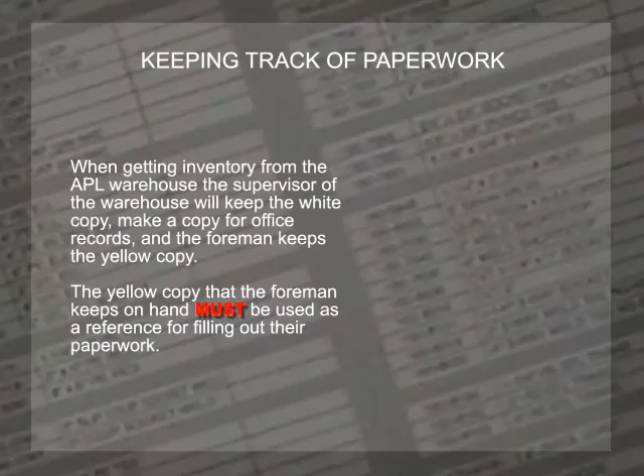When getting inventory from the APL warehouse, the supervisor of the warehouse will keep the white copy, make a copy for office records, and the foreman keeps the yellow copy. The yellow copy that the foreman keeps must be used as a reference for filling out their own paperwork. Your yellow copy must be kept on hand to account for all your inventory when filling out weekly partial reports and completes. This will save time and help you recall all the inventory you got from the warehouse.

Remember, all your paperwork for that job should be accounted for in your complete packet. This means all inventory used, returned, or scraps thrown away should be documented.

Inventory is assigned to APL from Southwest Gas. It is then on the APL books until it is accounted for. APL is responsible to pay for lost and undocumented inventory.

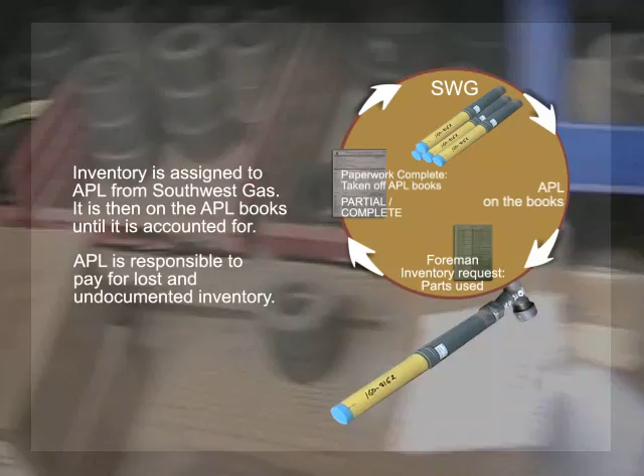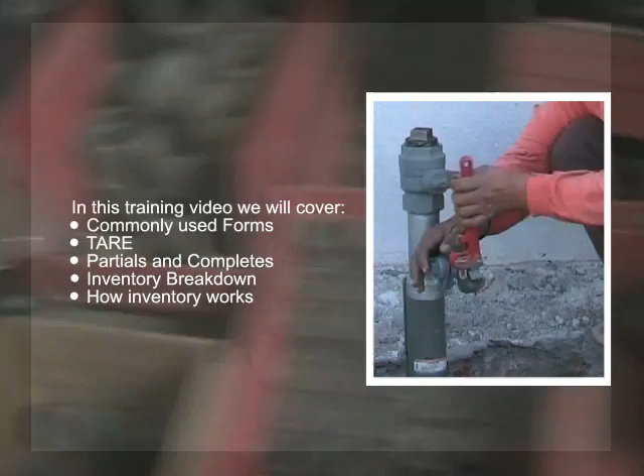In this training video, we will cover commonly used forms, TARE, partials and completes, inventory breakdown, and how inventory works.

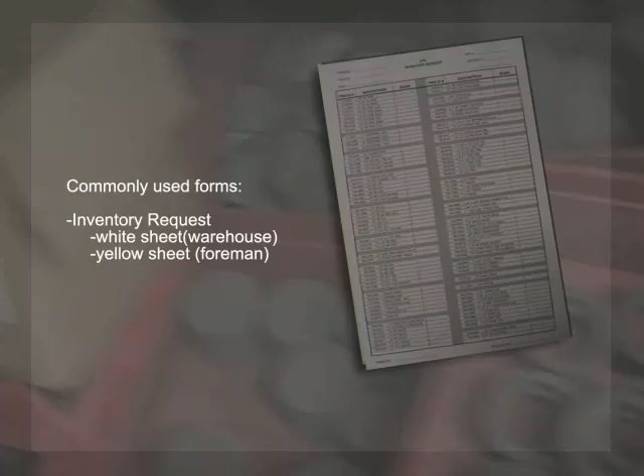These are some of Arizona Pipeline's commonly used forms. Inventory request sheet, white sheet for the warehouse and yellow sheet for the foreman. Mains, construction order, CO and SLST. Services, accelerated construction, AC and SX.

If the job takes longer than 1 week, you must turn in a partial weekly. There you document the inventory that you have used up to that point. Check with your superintendent on what day you turn in your partial.

When the job is finished, then the complete job packet is turned in, including all the weekly partials. All inventory checked out must be accounted for on these forms.

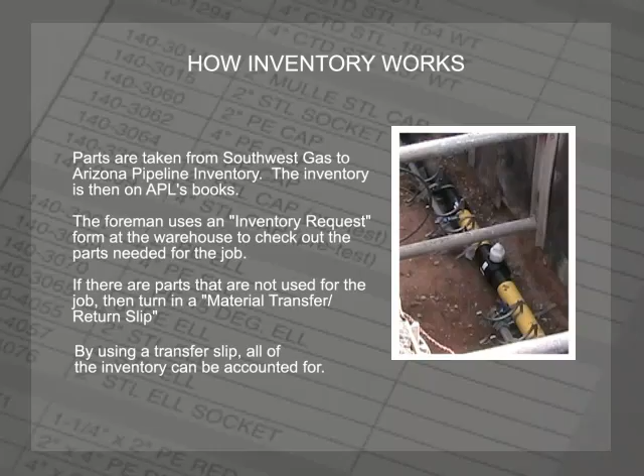Parts are taken from Southwest Gas to Arizona Pipeline inventory. The inventory is then on APL's books. Foreman uses an inventory request form at the warehouse to check out the parts needed for the job.

If there are parts that are not used for the job, then turn in a material transfer return slip. By using a transfer slip, all the inventory can be accounted for.

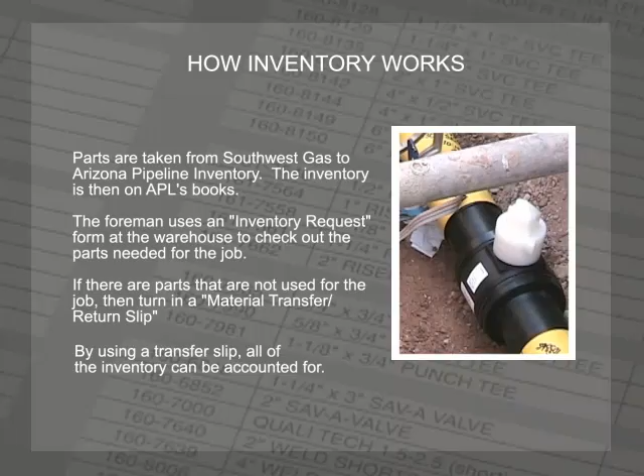If there are extra parts that are damaged or parts that can't be used, they should be charged off as TARE. The 6-inch PVC sleeving TARE would be shown on your paperwork as G TARE 100-9000 or S TARE 100-9000.

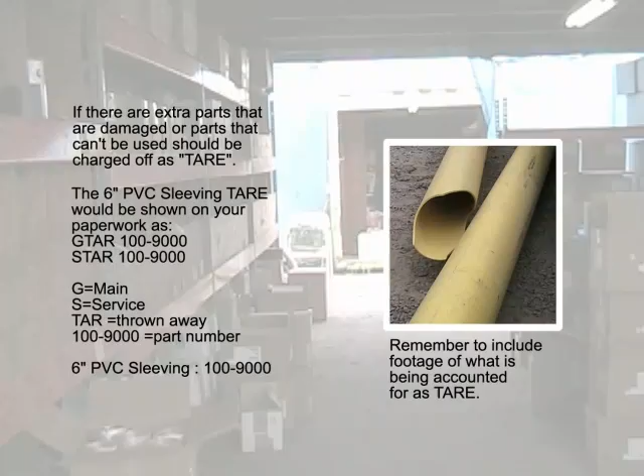Remember to include footage of what is accounted for as TARE. All materials, either installed or TARE, need to be accounted for on your paperwork for both partials and completes.

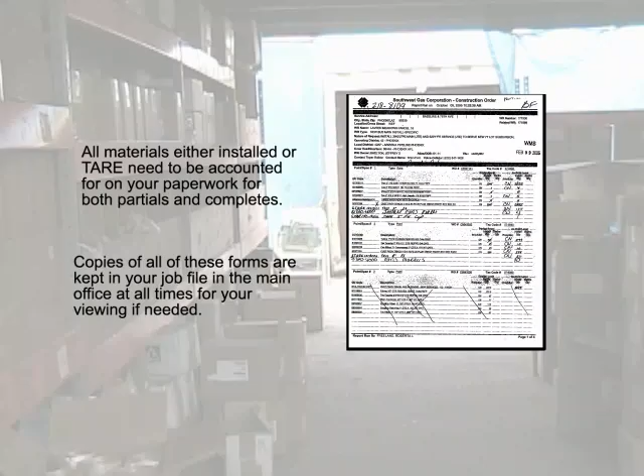Copies of all these forms are kept in your job file in the main office at all times for your viewing if needed. All inventory needs to be tracked to the WR number assigned to the job.

If inventory checked out is used for a different WR, then you are required to fill out a transfer slip and notify the warehouse so they can assign the inventory to the new WR.

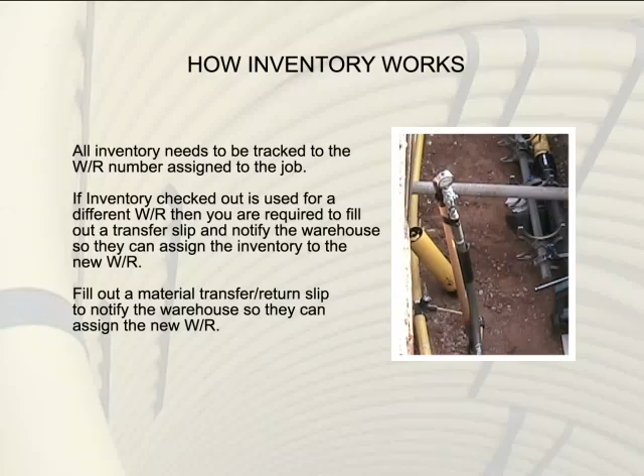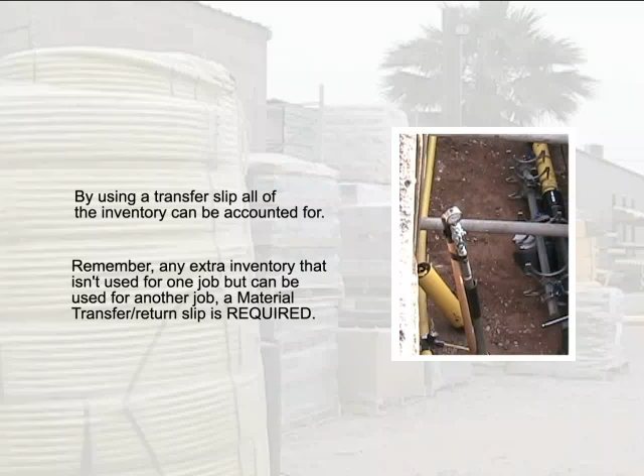Fill out a material transfer return slip to notify the warehouse so they can assign the new WR. By using a transfer slip, all of the inventory can be accounted for. Remember, any extra inventory that isn't used for one job, but can be used for another job, requires a material transfer return slip. Some common jobs have separate part numbers and each one needs to be tracked individually.

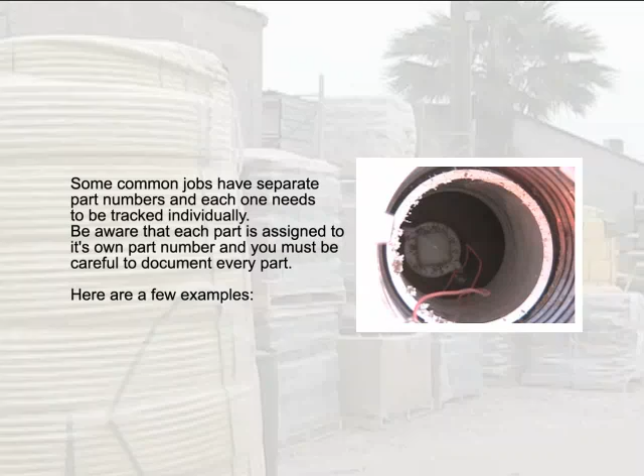Be aware that each part is assigned to its own part number and you must be careful to document every part. Here are a few examples.

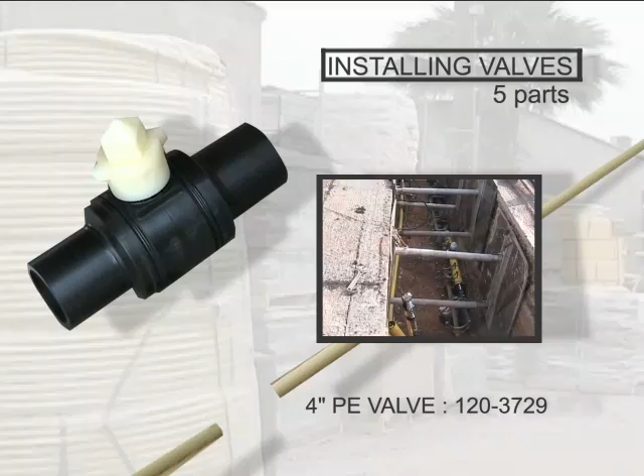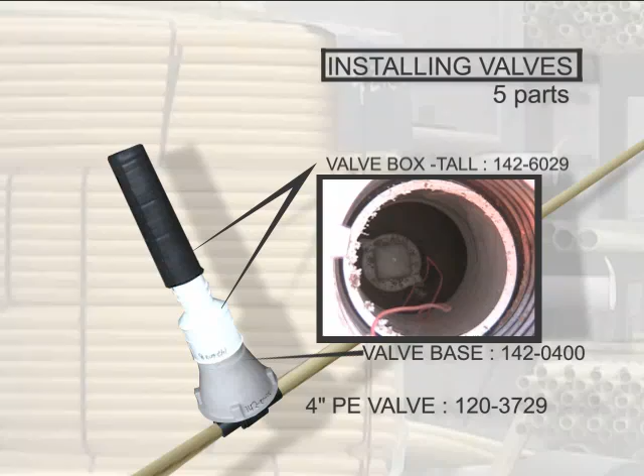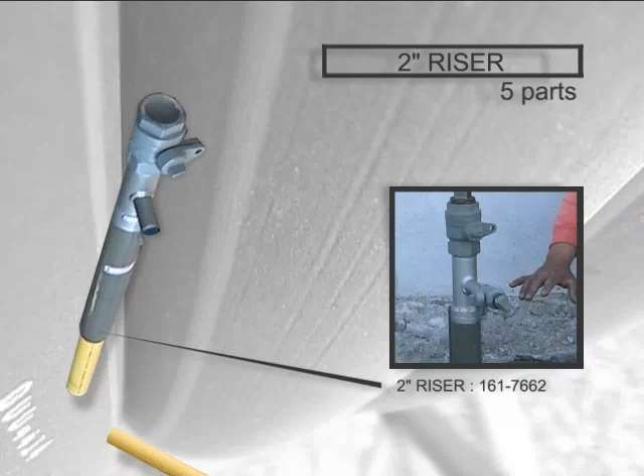When installing valves, 5 parts are required: the valve itself, the valve base, the valve box, a debris cap, and a gas lid. There are also 5 parts for the 2-inch riser: the riser, a 2-inch 90-degree elbow,

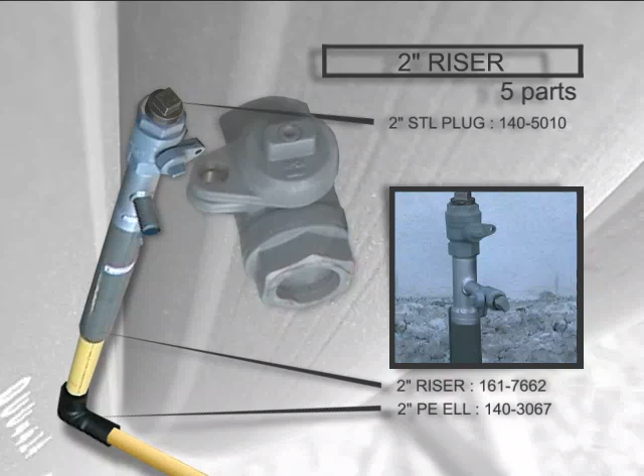a 2-inch steel plug, a 1-inch stopcock, and a 1-inch steel plug.

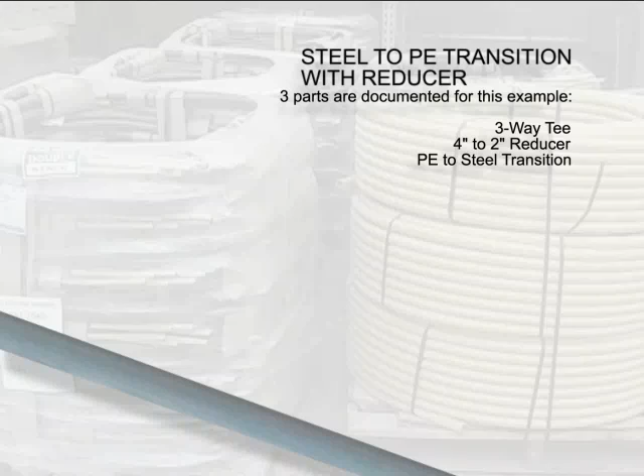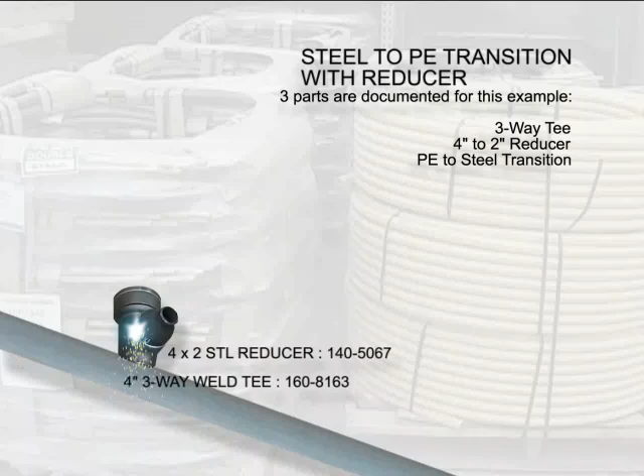There are 3 parts documented for this steel to PE transition with a reducer: the 3-way tee, a steel reducer, and a steel to PE transition.

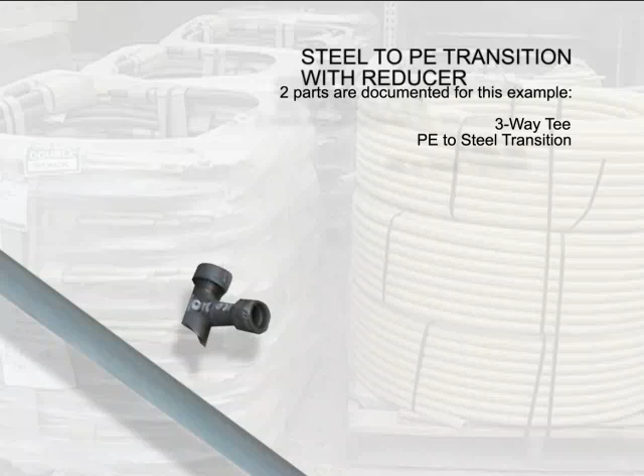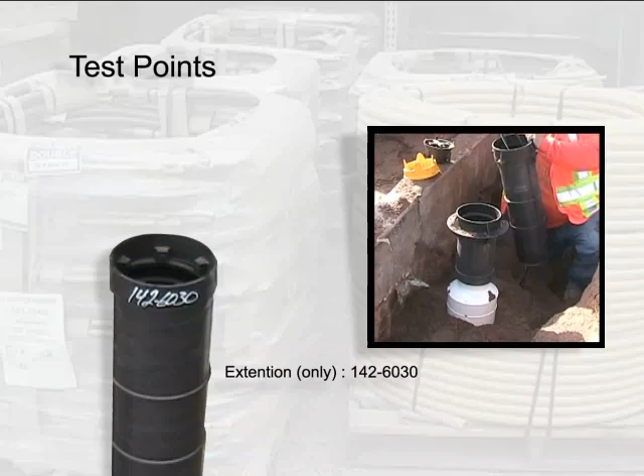There are only 2 parts for the steel to PE transition: the 3-way tee and the steel to PE transition. There are 2 parts documented for the test points: the extension only and the test lid.

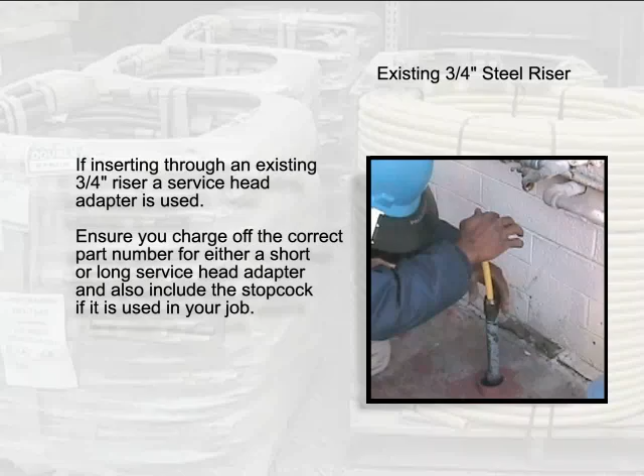If inserting through an existing 3/4 inch riser, a service head adapter is used. Ensure you charge off the correct part number for either a short or a long service head adapter, and also include the stopcock if it is used in your job.

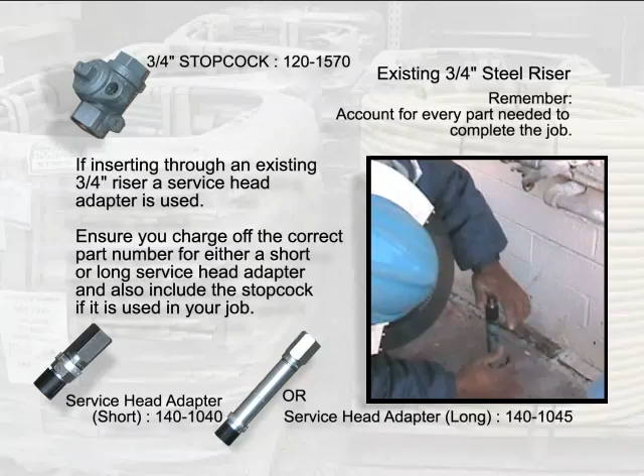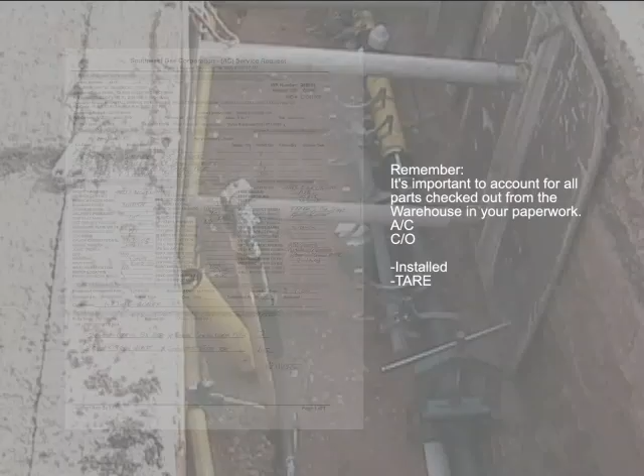Remember, it's important to account for all parts checked out from the warehouse in your paperwork, either AC or CO, with either installed inventory or TARE.

Any extra inventory that is checked out for one job, but is used for another job, you must use a material transfer return slip and notify the warehouse.

Remember, neatness counts, and if we all work together as a team, it will benefit us all. Accurate tracking with your inventory will cut down on paperwork corrections and lower the APL unaccounted for inventory.